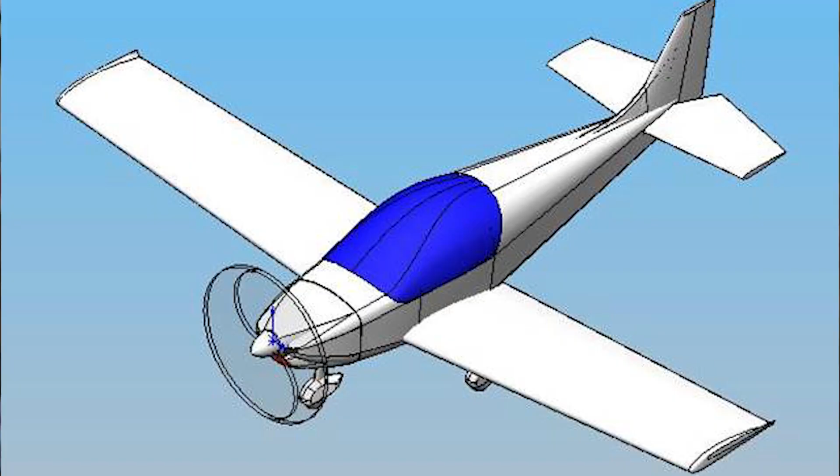We flew our first aeroplane, our first prototype, on the 18th of October 2008, about 15 months after we built this. We assembled the first one, serial number 001, in our little Pondoki in Edenvale, and only discovered afterwards that we couldn't get the bloody thing out without taking the wings off.

All our aeroplanes have always been made out of aluminium. We now make the center fuselage strong enough - it doesn't have a strutted wing, it's got a cantilever wing, you'll see just now, and they're out of composite. Big change for us, quite exciting.

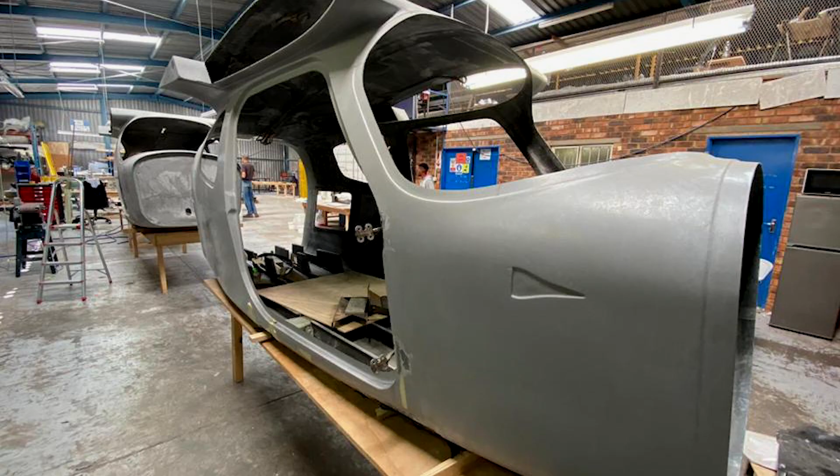We built 6 of these things and delivered them, but all of them on a kind of ad hoc basis. We're going into production right now, and we are going to do this at a reasonably consistent pace.

So this is R&D, it's our kind of skunkworks department. An aeronautical engineer is a machine for turning coffee into aeroplanes, and playing a bit of ping pong in between as well. This is kind of the brains trust.

These are actually early renderings of the high wing, so we can draw that from the design before we've built a single component.

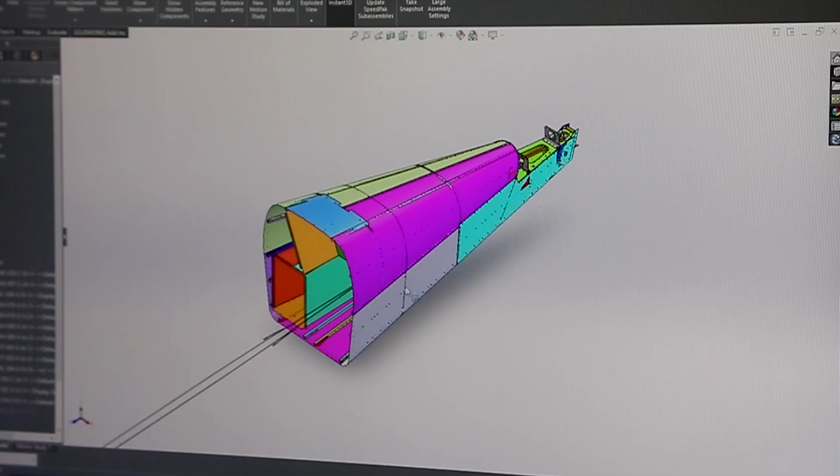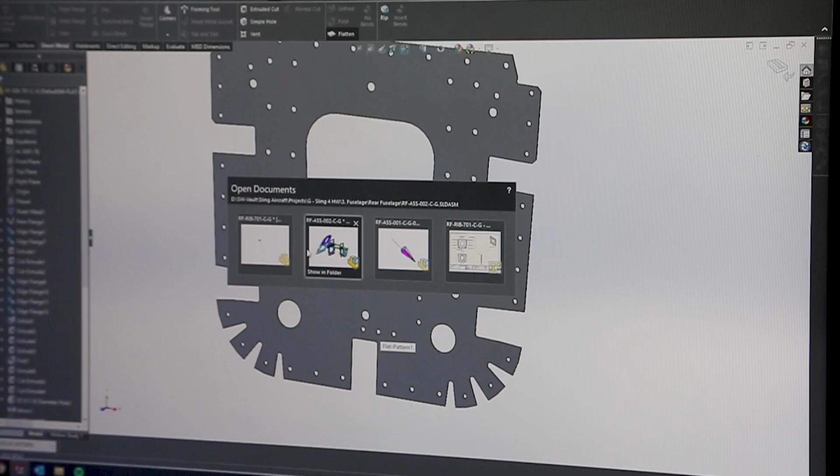This is an example of sections of the Sling 4 HW. If you open one of those - he's opening one little bracket over there - he can flatten that part, and when it's flattened you can make a punch file, which goes on a USB stick. The guys in Elroad get sheets of aluminium, put that stick into the CNC punch, and it forms them. It's called hydroforming, with polyurethane over a former, which we've also cut on the same punch.

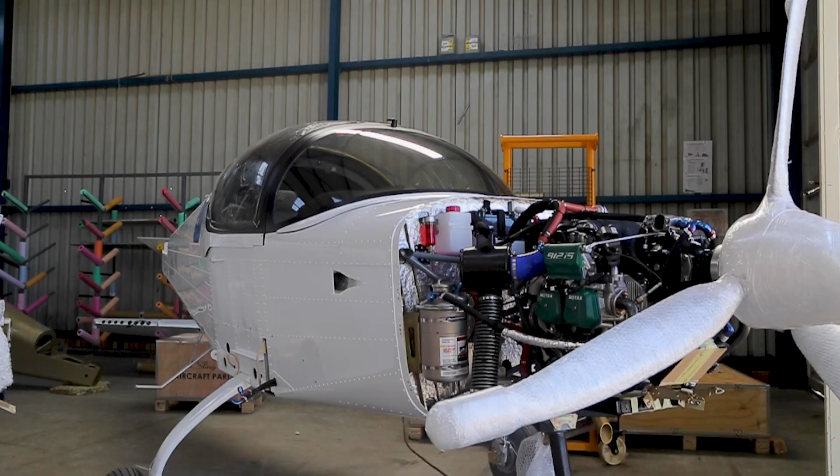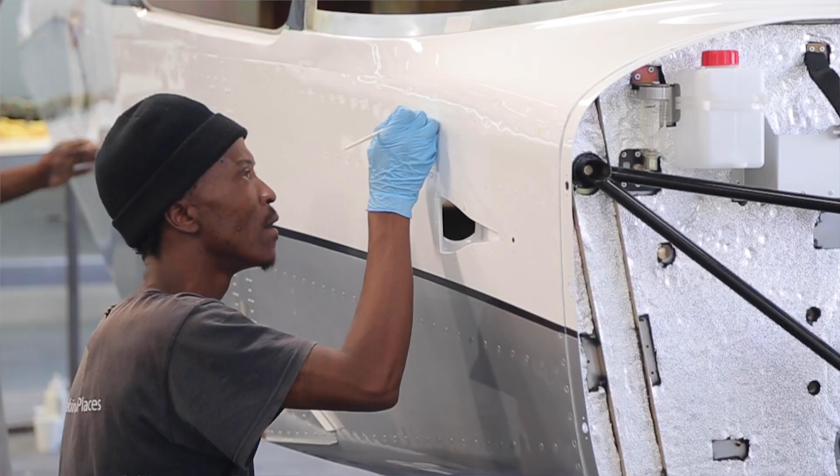These are Maxlings. This aeroplane is the best training aircraft on Earth today, I believe, without a shadow of a doubt. It's reliable, it's forgiving, it's incredibly cheap to operate, it's reasonably priced to buy. They maintain their value, unlike motor cars - essentially everybody who's ever bought one of my airplanes will sell it for more in straight rand terms than they bought it for.

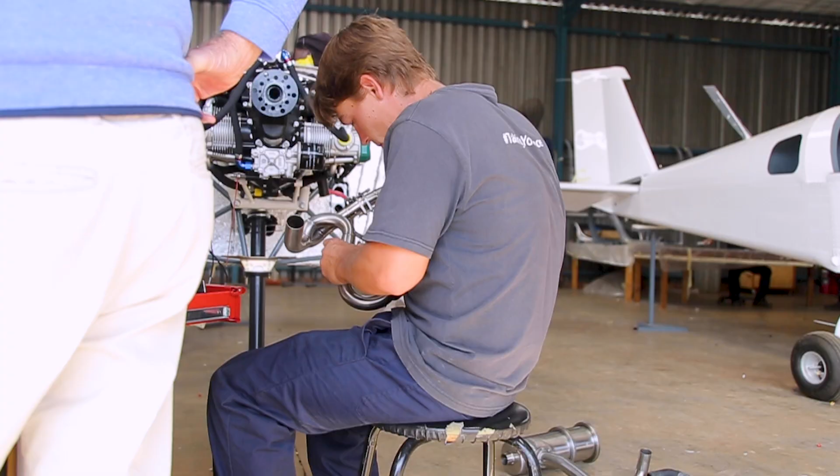What I'm going to show you here is we bring from our store and kit packing all of the kits we send around the world. So this is a container.

Alan, where is this going? Poland. So it's quite empty, this is going to Poland. We have sold to 28 countries around the world, so our reputation is good. I'm surprised that Americans, South Americans and Europeans are happy to buy a technology product out of Africa, but they are. I think the movies we've made, and going to the big air shows around the world, helps. But it's exciting to see Poles, French, Italians and Dutch people, our European distributors out of Holland, buying these.

How many planes going in here? So actually, is this just one kit? Yeah, just one plane. So it's an airframe kit, that's without the engine and prop.

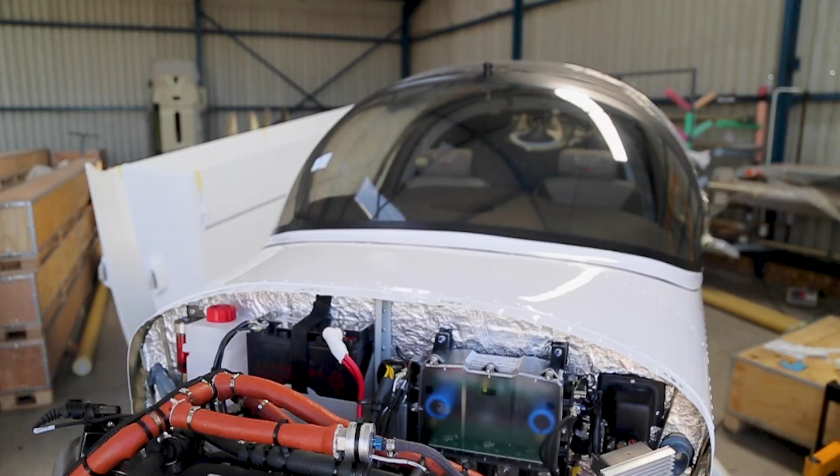It's good for us to engage with our aviation authority, and I think it's good for them to engage with us too. It kind of relaxes things, normalizes them a bit. We obviously need things from each other, so I love to have them here and help them with things not directly related to applications we need documents for.

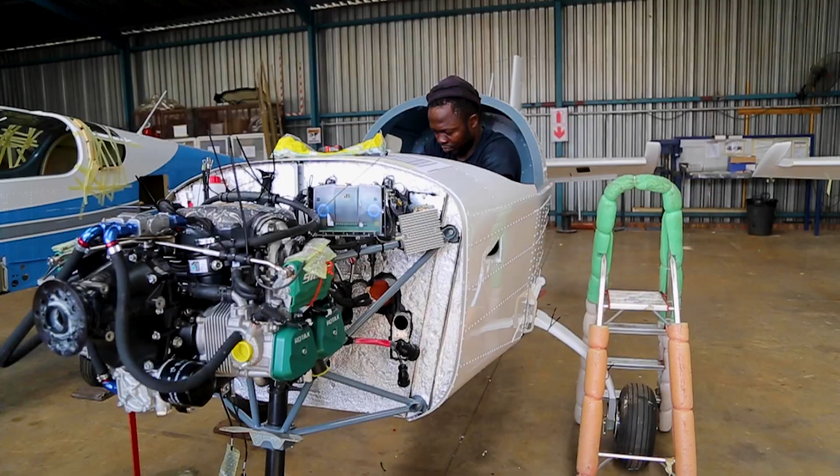The sub-assembly, the wings actually go directly to final assembly, and the tails come in from that side, get painted, come here, and they hang the engine and fit canopy frames. The two-seater one slides, the four-seater opens like a gull wing.

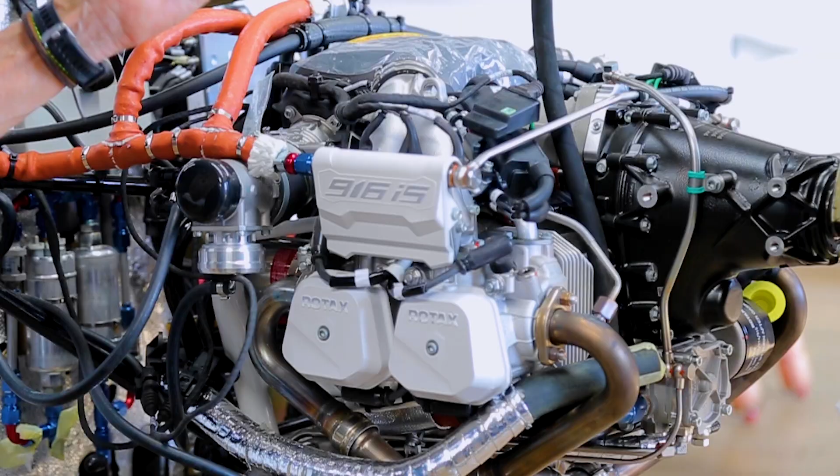This is the new 160 horsepower Rotax 916 engine. We had in between the 141 horsepower, called the 915, which has a 1,200 hour overhaul requirement. They've worked well, but this new engine, we got a pre-production model because we're close to Rotax to test it, and it goes straight to 2,000 hours. It is as smooth as butter, just perfect.

The last thing we're going to look at next door is our electrics department, which does the most beautiful panels for these aeroplanes. About a quarter of the value of the aircraft is in the panels.

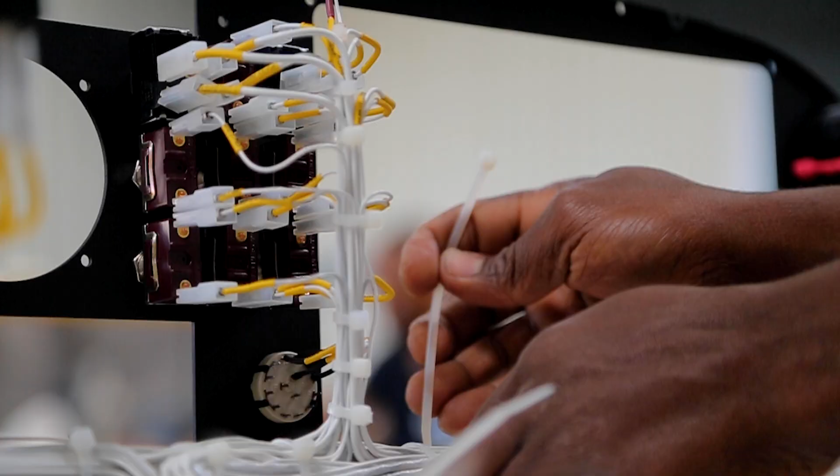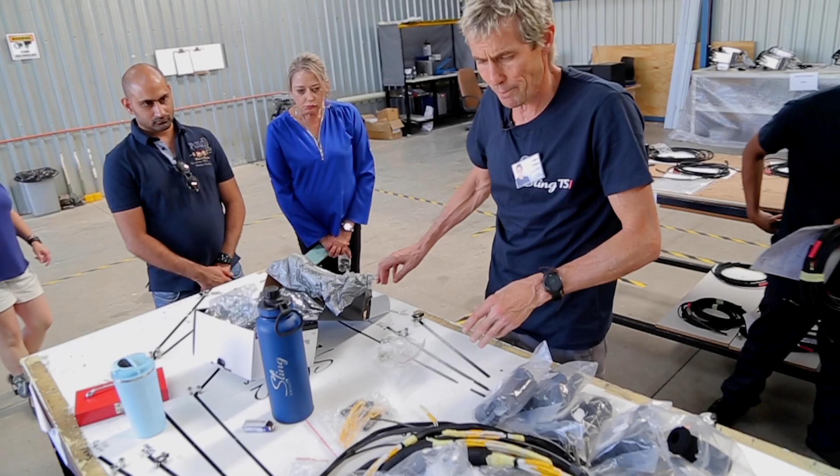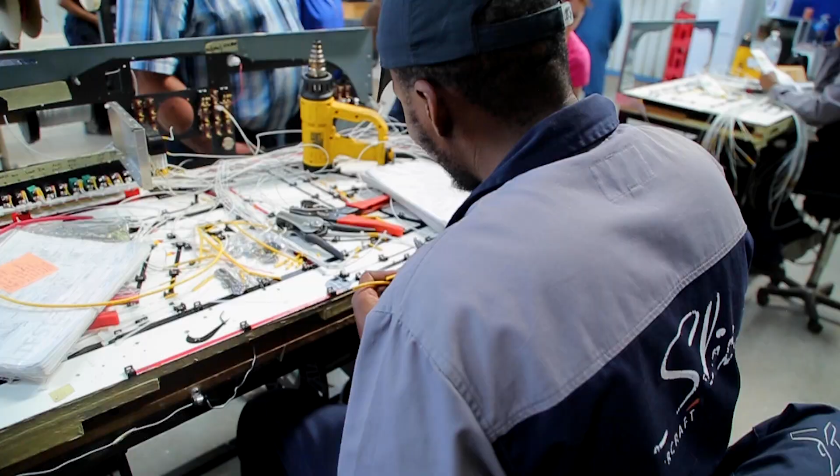And then right at the end here, they will take a panel, we'll go look at them over there, but they're wired over here. This is complex and detailed work, because every single one of the terminations on every single one of these wires has a pin which has to go into a locating hole, and each of these plugs typically has between 4 and 32 little connecting pins in it.

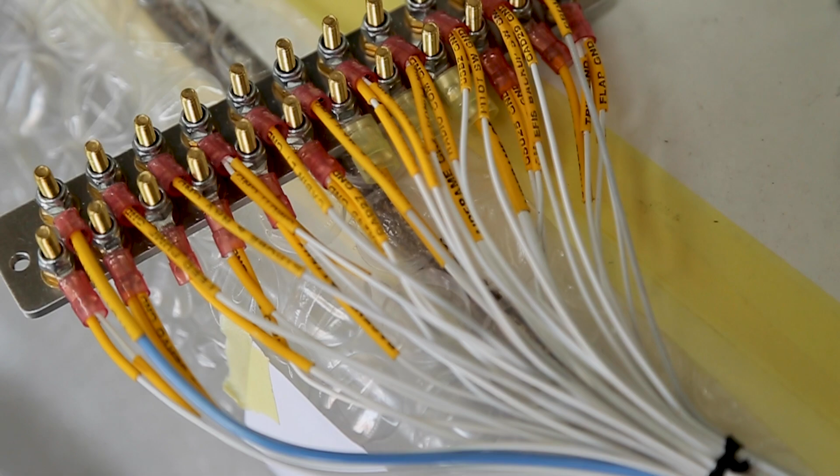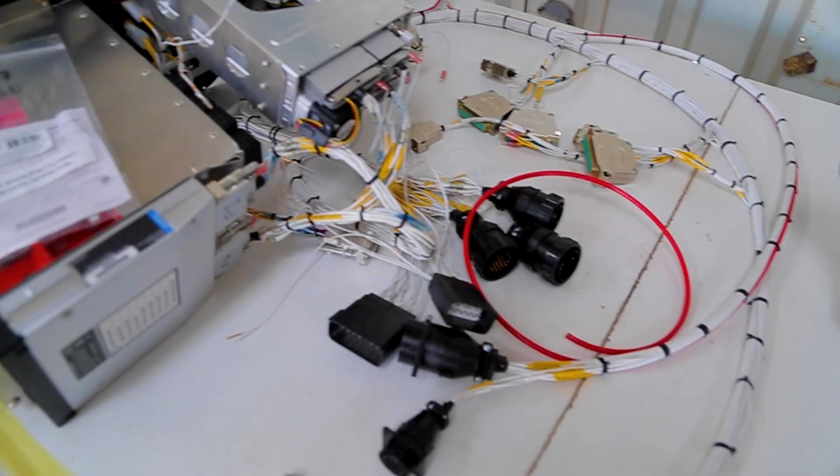Because we do all of these things ourselves—if you were in Europe, you would outsource the electrics to one bunch of guys, composites to another, and then assemble the end product. Because we do all of this ourselves, we can control the quality, we make money, and we can do our own timing. If you come and have a look over here, you'll get an idea of what the instrument looks like.

How was it? Amazing!

Air conditioner, nothing, you don't actually have it. You don't have air conditioner.

Lekker, man. How was that? Thanks.

Guys, we did a little bit of a weightless thing. It was a bit of, I had my intestines flying, but yeah, thanks man, thanks a lot.